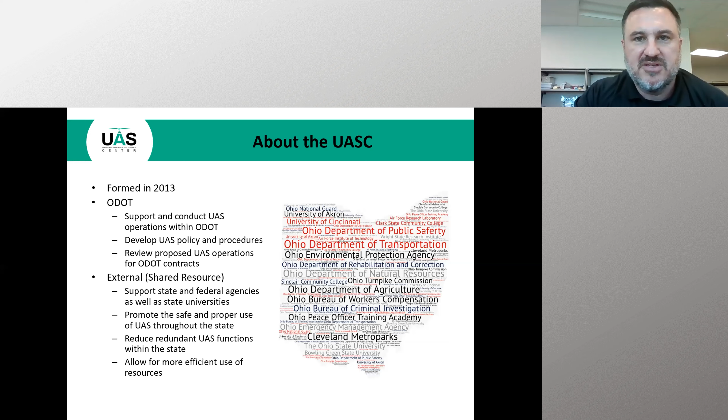If you're kind of new to this, probably all different levels of folks on this call, you might not be aware, but we're in the midst of an aerial revolution - the first being the propeller airplane, the second being the jet aircraft, and now electrification with these new vehicles. We're also coming into a crossroads with autonomy and lithium batteries and new computing power and higher processing power. So everything's kind of coming together all at once here.

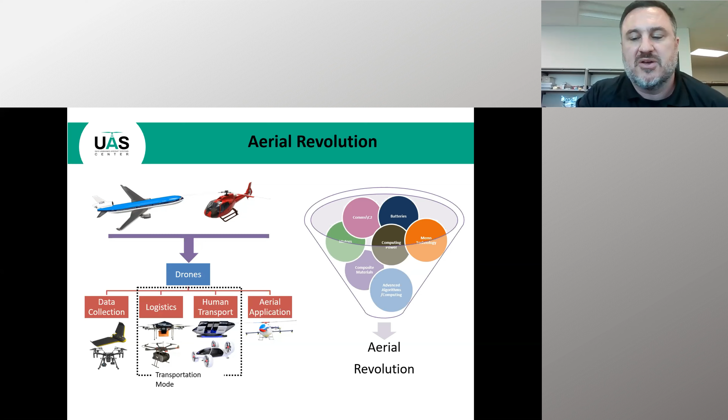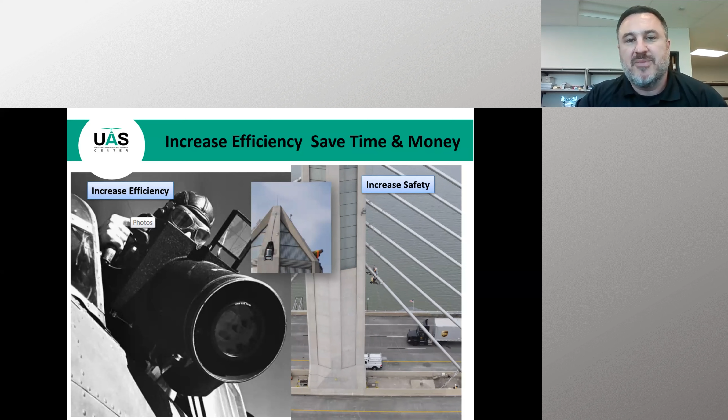So we expect to have big things coming over the next 5, 10, 15 years when it comes to electrification and automation of vehicles. So why do we use this new technology? Well, the first and easiest way is it increases efficiency and it increases safety. So we save time and money when we use this technology out in the field. And basically our responsibility is to improve and maintain the transportation infrastructure. So that's what we use this technology for.

So folks from all over the world on this call, and at least in the United States we probably have a lot of folks from the US on here as well. Up until 2016, things were really different. Folks couldn't operate commercially really that much unless you had a 333 section that only lasted about a year. So people were only flying under the public COA.

So in 2016, when the FAA had the remote pilot certification, things would really change for us. We were able to increase our staff, be able to have quicker, more efficient operations, and we started to buy more aircraft. So you can kind of see the trends starting to spike with our organization as far as purchasing new aircraft.

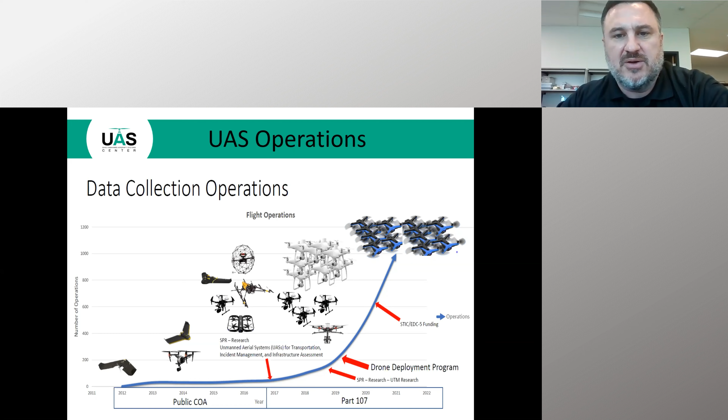So our fleet really consists of - we've got fixed wing aircraft, we've got an eBee Plus, we now have 8 Skydio 2s, we've got 4 M200s, M210s, we have 2 Inspire 2s, we have a heavy lift aircraft, the M600, which we use primarily for magnetometer. I'll give one example of that.

So our major uses: aerial photography and GIS, interior and exterior inspections, construction monitoring, traffic monitoring, emergency management. We do a lot of communications and promotional videos inside of our Department of Transportation. We look at a lot of structures and facilities.

So here's our flight operations summary over the last couple of years, and this is provided to us by one of our sponsors, Skyward, for this call. So we do a lot of our flight planning and our scheduling through Skyward, and I couldn't imagine doing it without them. So in 2019, we had 1,471 individual flights and 344 projects.

In 2020, we had 2,009 individual flights and 552 individual flight logs or flight projects. So that kind of spiked when we started getting the technology in the hands of experts.

So we decided, with the way things were, we weren't able to hire new staff, so we wanted to train the experts inside the Ohio Department of Transportation. We really got this technology in the hands of primarily two groups, even though there's more - the bridge inspectors and the surveyor folks. So we have what we call our district drone deployment program. We get this technology in the hands of the folks that are out there doing this stuff every day.

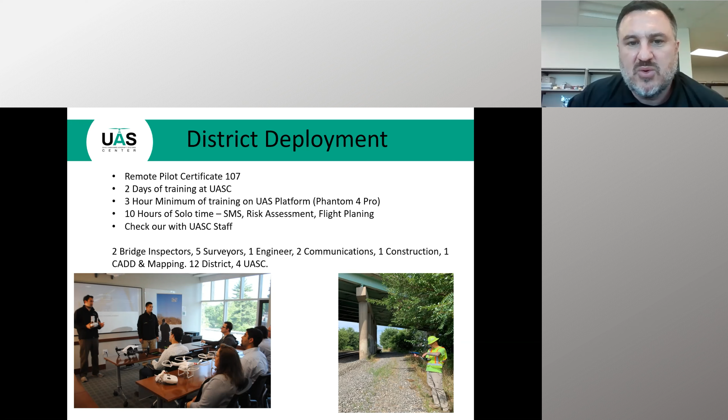So we've got 2 bridge inspectors, 5 surveyors, 1 engineer, 2 folks from our communication shop, 1 guy out of construction, and 1 guy out of our CAD mapping. So we've got 12 district folks and 4 UAS center folks out there flying on a regular basis.

One of the things we look at primarily the most is traffic monitoring. We get called out the most for traffic monitoring. Here's a recent article about a drone survey by the Department of Transportation Unmanned Aircraft Systems Center that led to traffic signal changes done by the city of Brooklyn. So we look at a lot of traffic signals with UAS and see how we can adjust it.

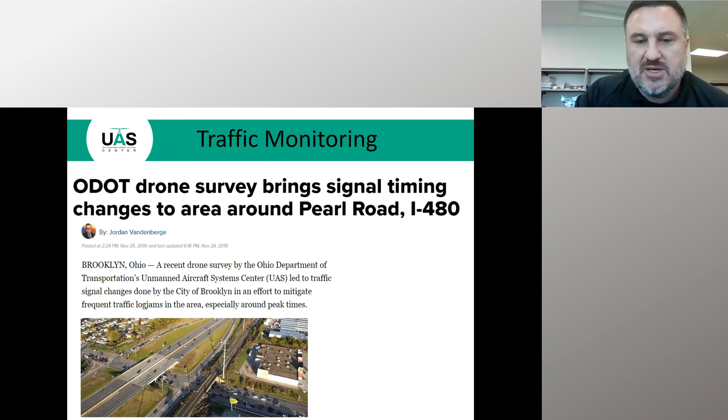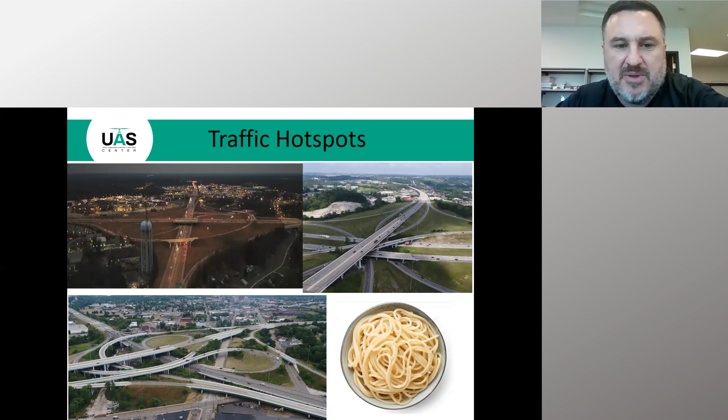Other areas with traffic hotspots - I always say if it looks like a spaghetti bowl in Ohio, we're taking a look at that and seeing how we can increase traffic flows and what might be hanging up some of the traffic in those areas. Lane closures and lane shifts are another big one. If we have a lane closure, there's always traffic that's building up, a lot of accidents occur. So we want to figure out new ways we can make the traffic flow smoother through these areas.

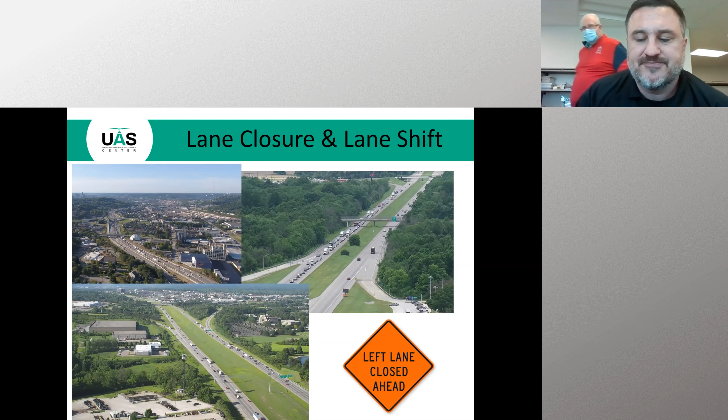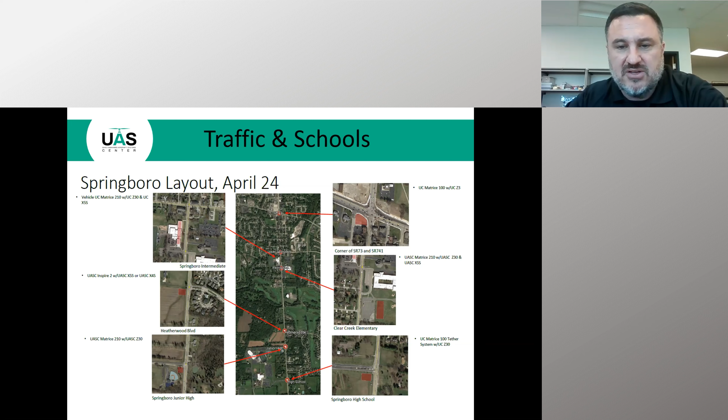Another big one we get called to - traffic is always flowing smoothly until, what time, 3:05, when school gets let out. That really changes the dynamic of traffic flow in a given area. So we get called out to a lot of areas to assess traffic during school hours, whether it's in the morning or the afternoon. This particular one you're looking at is in the city of Springboro. They have 5 schools that are kind of bunched up close to each other, so we're able to fly 6 drones simultaneously at different locations to assess the situation and see how we could increase traffic flows.

Another one we get called out to are special events - Black Friday, big increases of traffic. The net effect of that is it builds up traffic on the freeway. Another one is our state fair, same thing - parking's an issue there, and also it dumps a lot of unwanted traffic onto the freeway. So we're using this technology to see how we can increase traffic flows, maybe get people parked a little quicker into these special events.

Another one we look at a lot is natural disasters, landslides, and tornado activity. In 2019, we had a significant amount of tornadoes that went through the Dayton, Ohio area and devastated a lot of the areas. So we partnered with the Ohio National Guard and provided all the overhead view using UAS technologies. Another one we get a lot is flooding.

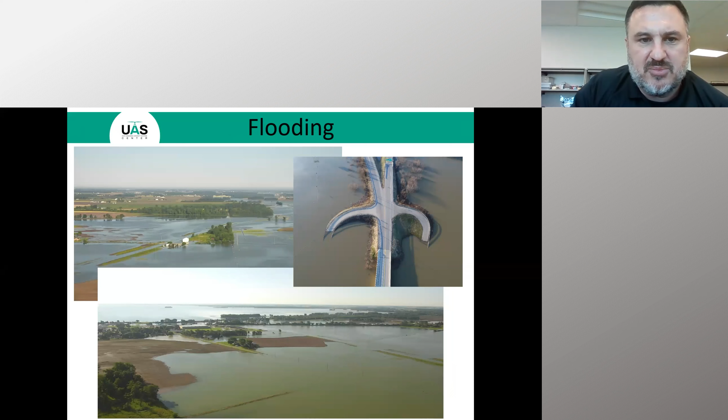We also can use our thermal technology to see existing landslides in areas that you couldn't normally see with the naked eye. You can see here it shows a gap in the surface that the folks weren't able to see by just surveying on their own. We're able to put the aircraft in the air and take a look and see, hey, there's something here worth checking out.

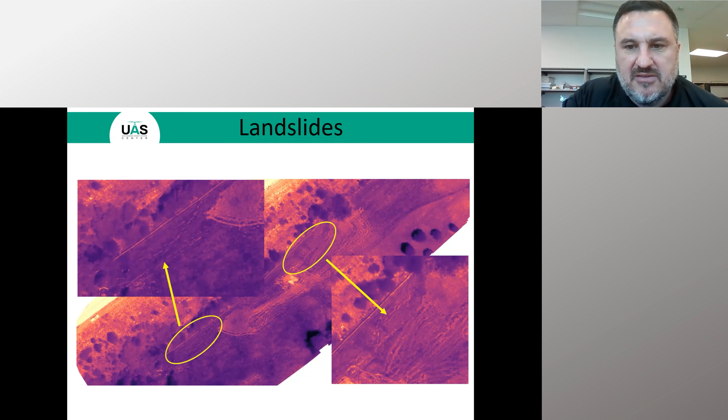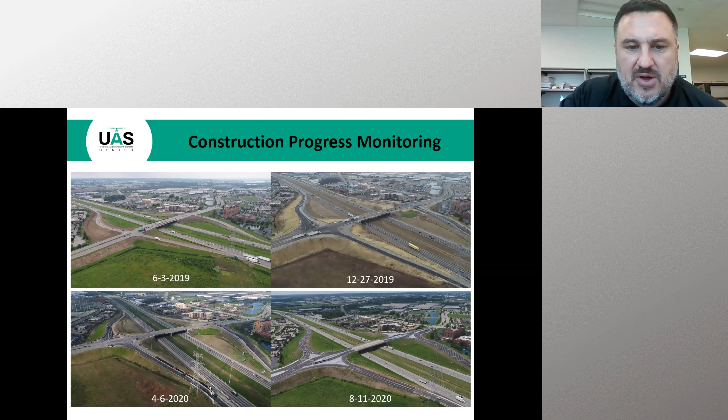Construction progress monitoring is another one we get called out to all the time, looking at various construction projects before, during, and after. Engineers want to make sure the projects are going on time, so we get called out frequently all over the state to take a look at it.

Another one is bridge construction. We look at a lot of bridges. Bridges are always being repaired or new bridges coming up. So we're always looking and documenting interchanges, new construction areas, or improving existing areas.

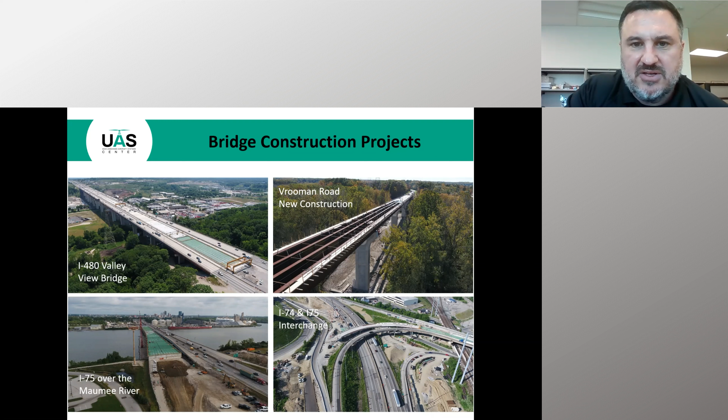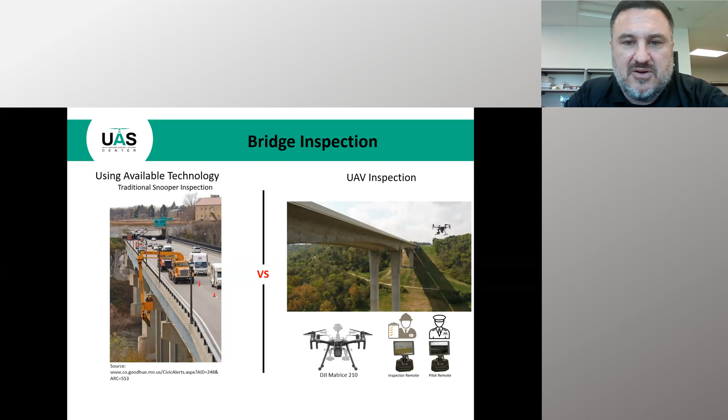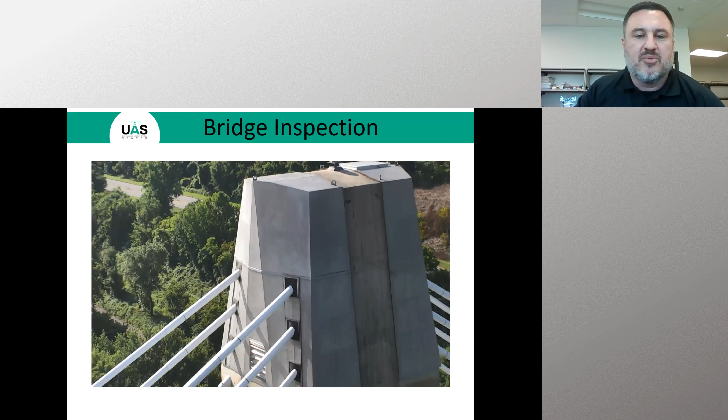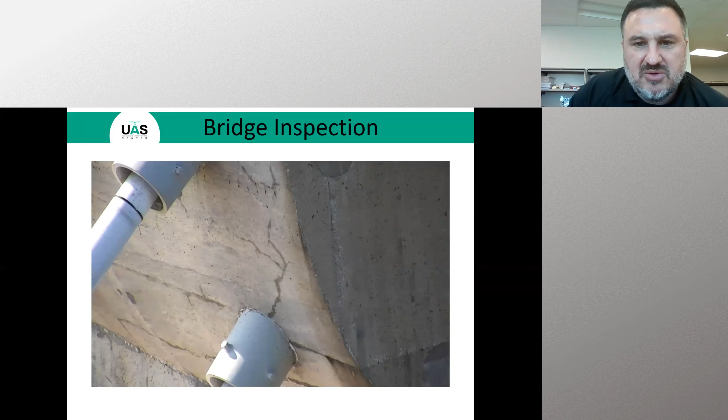Here's an example of a bridge that's really high up. You'd have to pay someone to go up there to take a look, but instead we're looking at an existing crack here, and we can zoom in to see if the repair job is still holding, which we found out it was in this case. It's a perfect example of how we're using technology.

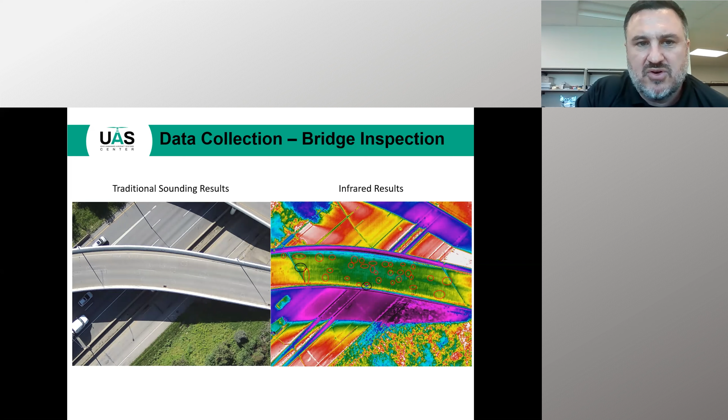I mentioned some delamination detection techniques using thermal cameras. Here's an example. Instead of using traditional sounding methods, we're using a thermal camera. Here's another vantage point underneath the bridge. You can really see the contrast using electro-optical versus thermal technology, and you can clearly see the cracking and delamination on these bridge piers.

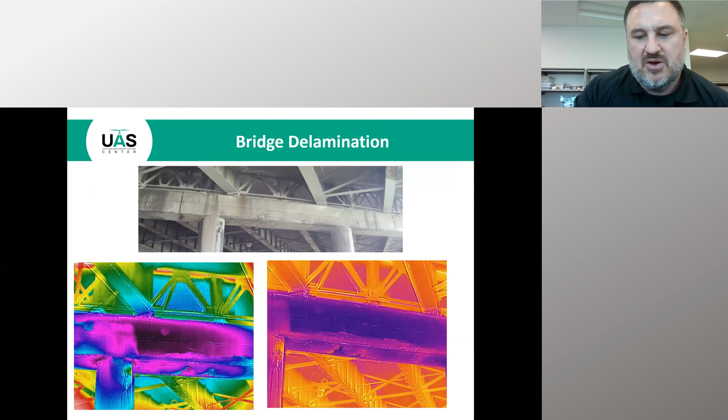So we sought out here, Juan mentioned that we tried to do some return on investment calculations. Using bridge inspection was an easy target for us, so we looked at this and calculated all the labor and man hours it would take. On a given day, it would cost $3,143 versus $522 to send out 2 people instead of 6 people, factoring in the labor costs.

Shutting down a road is very expensive to do, with a lot of folks out there, not to mention shutting down a lane, which inevitably causes accidents - it always happens. So there's a safety aspect you really can't put a dollar figure on. We calculated, very conservatively, that we're saving at least $2,621 every time we send out a crew of drone inspectors instead of using a snooper.

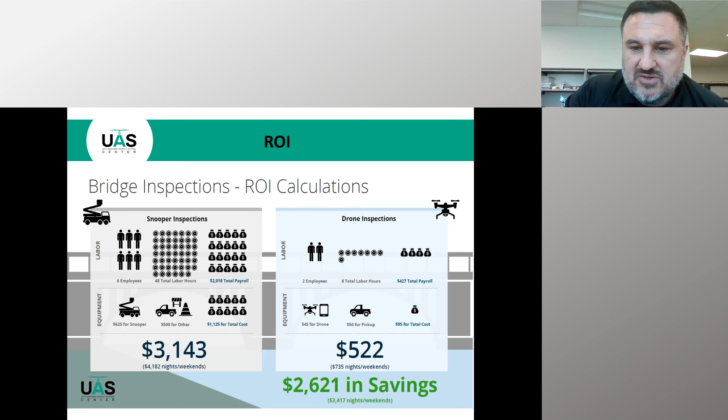So just a couple other examples before we move on - what we came here to talk about is some of the mapping features. This is a magnetometer we use, dangling down from an M600. Our Ohio Department of Natural Resources is looking for abandoned wellheads - they're environmental hazards, they leak, and a couple of them have exploded. We're looking to patch up some of the abandoned ones across the state, so it's a very effective way of locating abandoned wellheads.

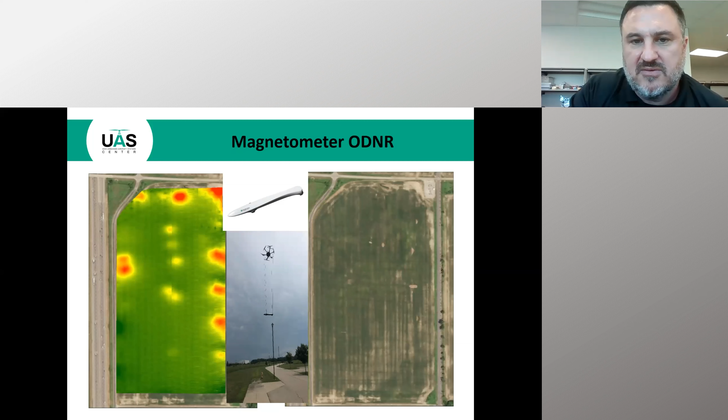Here's another mapping example - this is an orthomosaic. We worked with the city of Dayton, Ohio and the Dayton Police Department. They had a situation where folks were drag racing on this strip - you can actually see where they're launching their vehicles in the middle there. They wanted to mitigate the drag racing, so they wanted overhead photos of where they could put speed bumps in. Here we're stitching hundreds of photos together, and you can zoom in and out to get really high resolution areas to decide where they want to put the speed bumps.

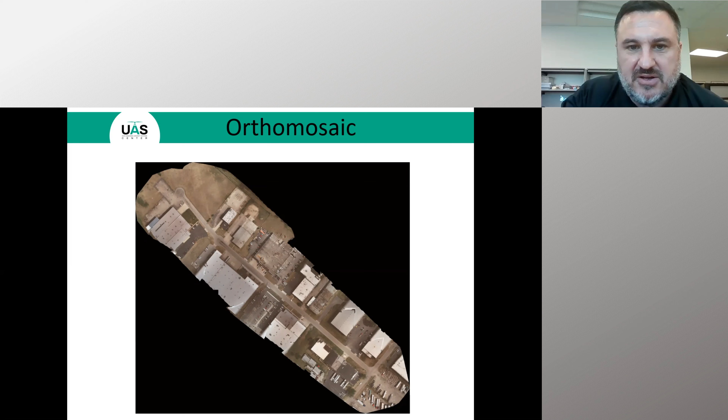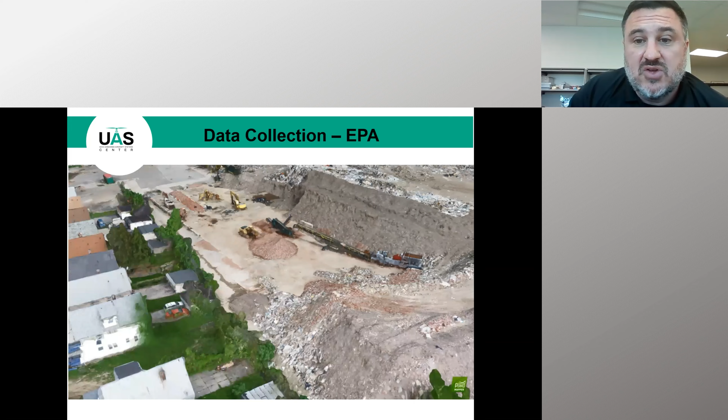Ohio EPA - we're doing a volumetric calculation to see what it would cost to remove this rubble pile. This was a company in the business of recycling homes that went out of business and left this big pile of rubble that the state of Ohio was tasked with cleaning up, so they called us out to do a volume calculation.

Here's another thing we do at the state. A lot of times we'll want to put in a new on and off ramp, and a private citizen will have a piece of property they want to sell to the state of Ohio. We worked with our Ohio Attorney General's office - they wanted to do a mapping of the area for purchase price purposes and to see what that would look like. Here's an example using photogrammetry and stitching photos together to put this together.

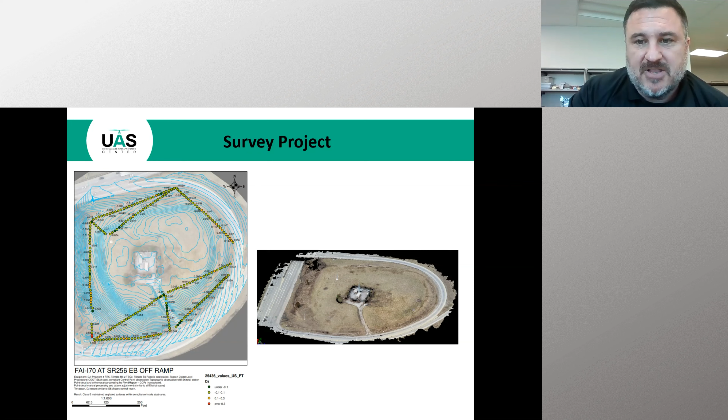A survey project - we're getting a lot of our surveyors into the drone business. This was one of our guys in our District 5 office. He used a traditional method of surveying together, and he also did one with a drone just to compare. He said everything, the accuracies are where they need to be, within all the margins of error. So this is a great example where you could use a UAS instead of traditional surveying methods to get the correct slope of the hill on the side of the freeway.

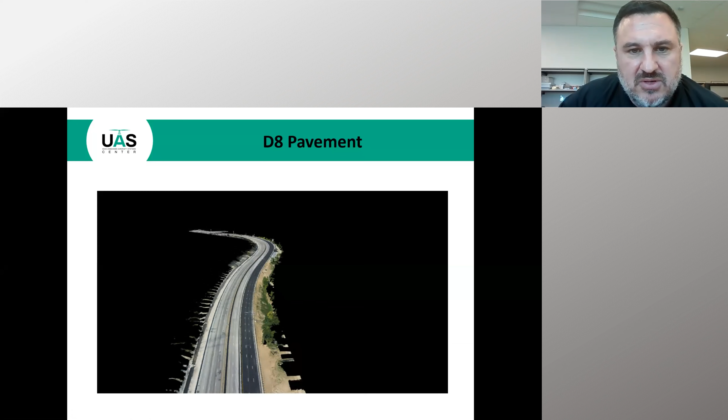Pavement is another area we're getting into. Jamie can talk more about this - he actually flew a very long distance to look at pavement being put down on a new road area. This is a testament to what you can do when you really push the aircraft and the photogrammetry to its limits.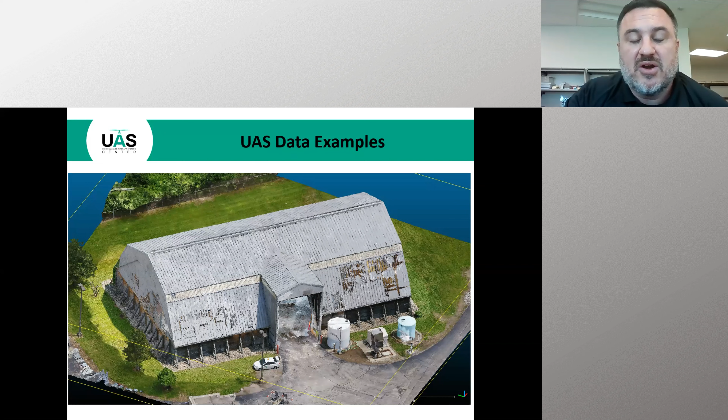Another example of some more stuff we do here - this is a salt barn. Folks that aren't blessed with snow like we are in Ohio may not have this problem, but we've got salt barns all throughout the state of Ohio that we're constantly putting salt out from during the winter months, then resupplying during the summer months. A lot of folks have asked us to do salt barn calculations, which we're in the business of doing now as well.

We have a question from David about the current state of information for GIS. He said traditionally they have been accurate to the county level, but highly inaccurate to the towns and individual parcels. Do you think the UAS program helps with that?

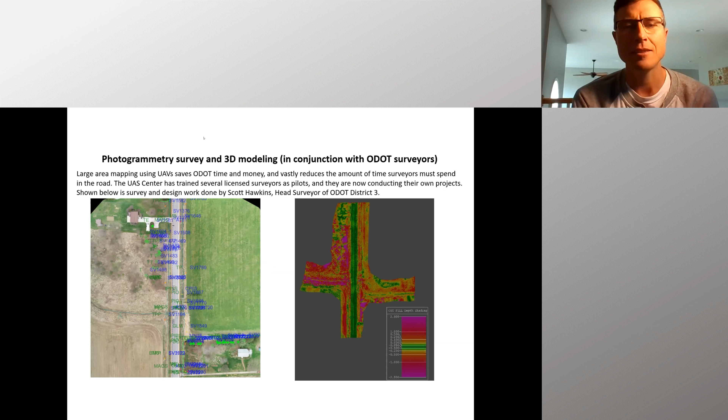Well, yes, we can make models, I know we can do that. And then he wanted to know, can we make them so that they meet our surveying specs? I was like, well, that part, I don't really know. So it was a bit of a journey, but I can give a sneak peek that yes, we can make them to meet their surveying specs.

So photogrammetry, for those that don't know, is the capture of photographs. There's no scanning involved, it's a completely passive process. You set up the drone and mark out your project area. The flight planning software will calculate exactly where the drone needs to go, what kind of spacing it needs, how often it needs to take a photograph.

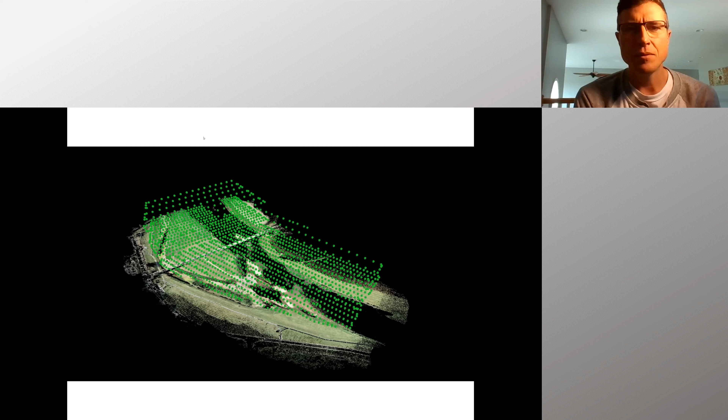It's pretty autonomous at this point. You just set it up, hit play, and it takes off, flies its mission, collects all the photographs, and you can cover a pretty large area relatively quickly doing this method.

The UAS that we're using for survey at this point is the Phantom 4 RTK. The big advantage this RTK system has is that it can tie into the ODOT CORS network, the virtual base station basically. Having that level of accuracy known for each photograph seems to really help with the accuracies of the photogrammetry projects.

We know that we've done a lot of testing with this. We know that the drone tied to the VRS is capable of getting X and Y accuracies down to 2 or 3 centimeters. The Z is pretty consistently off by about 1.5 feet.

So that's where the ground control targets come in. We work directly with the surveyors, we don't touch any of the surveying equipment. We'll give instructions on where we think the best places to put the ground control are. We'll set out our targets, and surveyors will shoot in the targets.

We've been using black and white squares in grass and vegetated areas, and we've gotten to painting targets on asphalt. Usually we've found that pink seems to be the best color for targets. Then we'll usually pound a mag nail with some blue ribbon taping into the center. That combination of pink paint with blue ribbon makes a really nice target - it's really easy to see the center and mark all the photographs.

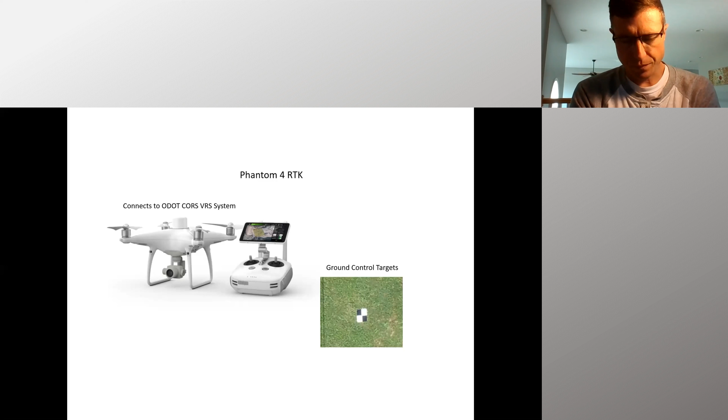When I first started at the UAS Center, the University of Cincinnati had been doing a research project with ODOT and the UAS Center to figure out how UAS can be used with ODOT. One of the things they were tasked to do was figure out if UAS could be used in surveying and what kind of accuracies they could get.

They were starting off with no UAS experience. They were having issues with how best to fly the UAS and how best to do the ground control. But what they were really good at was analyzing the data. So once we started collecting the data and flying the UAS at the UAS Center, we would send the data to the University of Cincinnati to determine if it was accurate or not. And it turns out it is.

To date, we have 4 surveyors out. We've done probably, I would guess, around 30 projects. At this point, 3 of the surveyors are out collecting their own data, setting their own ground control. They send me the photos to do the processing, and then they do their own accuracy checks on all the data we send back. In the 30 projects we've done so far, every single one has come in with accuracies under the surveying specs.

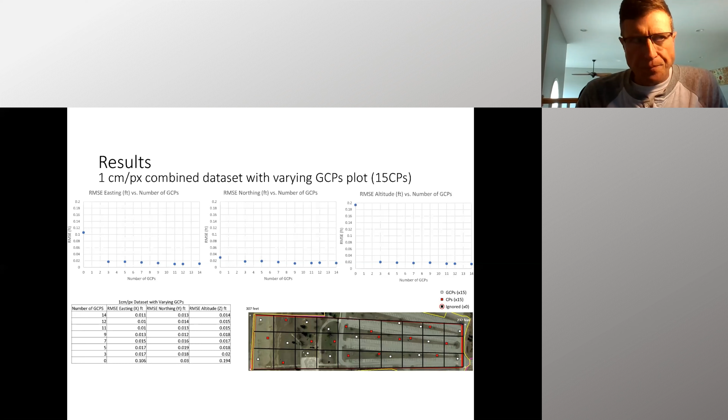Just a real quick rundown of how photogrammetry works for those that don't know. The idea is to get photographs that overlap each other. I like to have overlapping photographs of 80%, so one photograph will overlap the one beside it by 80%. That way there are common points between each photograph.

Has ODOT been affected by the federal government restrictions on DJI products? Currently we have not been asked that. We do have some security concerns inside our Department of Transportation. We're trying to work through and sort through them, specifically about the flight logs and where they're going. So there hasn't been anything at the state level that's banned them yet, but it's something we are following very closely and are concerned about.

And how about the software analytics, predictive aggregation? Do you use a specific software brand? We use Pix4D and we use Bentley Context Capture.

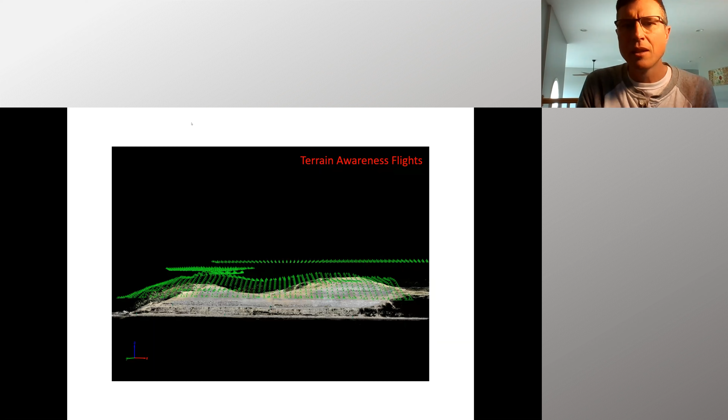Most of the projects that surveyors are wanting to do so far are like culvert replacements and intersection work, but we have gotten into some pretty dramatic terrain awareness flights, like this one. To give you an idea of just how big that area is and the amount of terrain involved, the excavator is sitting on the side of the slope, basically at the edge of the cliff.

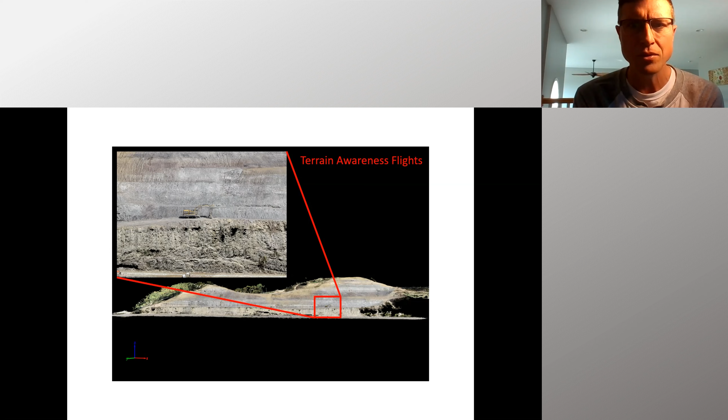So the processing part - when I started at the UAS Center, one of our biggest issues was that we did not have a computer capable of handling the amount of data we were getting. It's very computer intensive to do the photogrammetry process. So after a lot of nagging on my part, IT finally broke down and gave us basically a processing server with 6 very high-end computers connected together. On those computers, we use Context Capture and Pix4D.

We found that Pix4D does really well with small surveying type projects, the culverts and things like that. Seems to make the best ortho mosaics. But it's not the best software for three-dimensional objects like buildings. So for that, we use Context Capture. It seems to do a really good job with 3D objects. The other advantage Context Capture has over Pix4D is there doesn't seem to be a limit to the amount of photographs that can be input.

So the Springfield-Beckley Municipal Airport is a project we did last winter. We sat on this data set for over a year because we just didn't have anything to process it. But in total, we surveyed 1,000 acres. We used 3 Phantom 4s to do it, with this 1,000 acres at 2 centimeters resolution, and then we surveyed each runway at around 0.8 centimeters resolution. Ended up collecting 24,000 or so photographs.

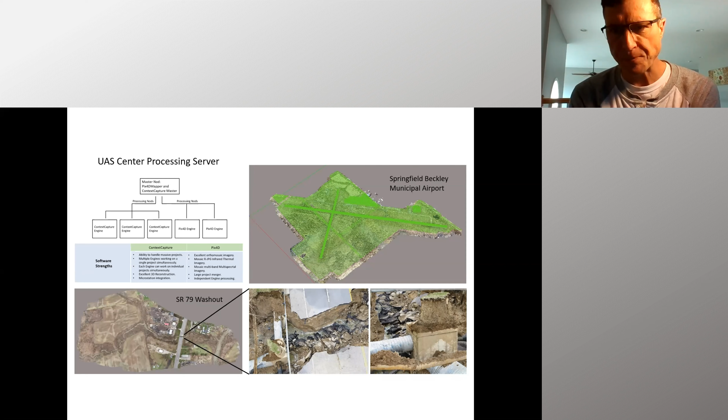It's one of the highest detailed models I've seen.

I'll mention that we do have a UAS LiDAR unit. It's in the early stages, we've worked out most of the kinks with it. But what we're finding is that for our specific unit, it's not as accurate as photogrammetry on things like pavement, hard surfaces. The accuracy is just not as high, and it's not as consistent either. But what it does do that photogrammetry can't—I say the kryptonite of photogrammetry is trees.

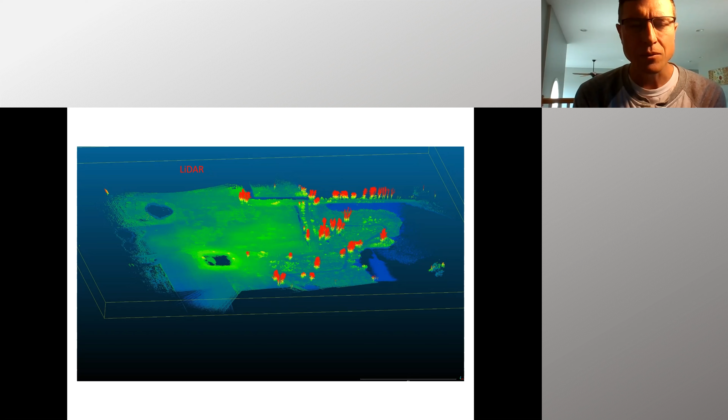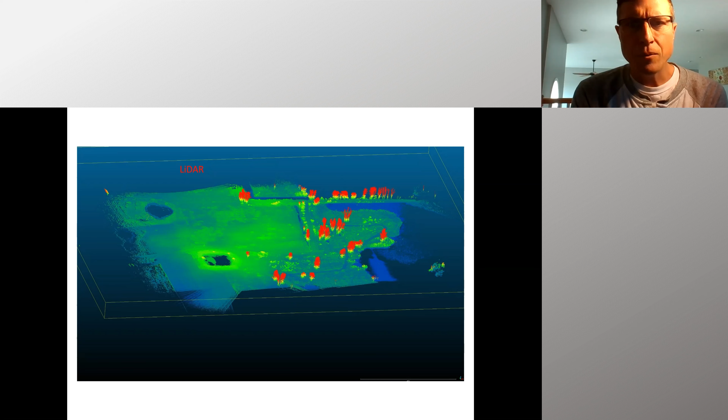Since taking photographs is a passive process, it can't penetrate through vegetation, it can't get through trees. But the LiDAR can allow us to get through the vegetation for hard surfaced areas. So we've been using it a lot for environmental type stuff, like wetland delineations, and we're going to get into doing some archaeology work with it, and getting into heavily vegetated areas for survey type stuff. I don't ever see us going with this specific LiDAR unit to do road surveys, but we still have a use for it.

And that is the end of my presentation.

Okay, Jamie, we have a few questions here—very technical regarding what you do. How much site control do you set for the 1.5 miles of drone topo used in the recent savings example?

Yes, so that's with the Phantom 4 tied to the CORS system. If you're using a drone that wasn't tied to the CORS system, or if we use the Phantom 4 without being tied into the VRS, I'm not sure that would still hold. But as long as we're tied into the VRS, that seems to be the case.